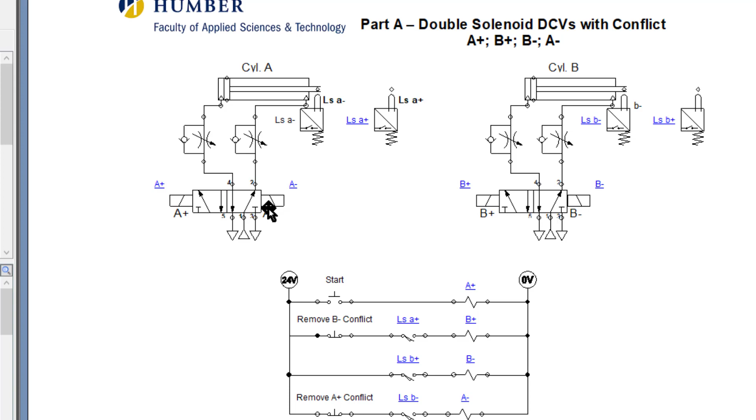So for this drawing, I think I'll just take the ladder logic and put it aside, since I'll probably rebuild the whole thing, but I'll stick it over here. The other thing is I'm going to need 3 cylinders, so I'm going to grab this whole thing, copy it, paste it, and put it down here. Now I have 3 cylinders, and I can just modify what's here.

Like I said before, I want to get some other information, and that's going to be the ancillary equipment - the compressor, the pressure regulator, and the receiver tank, and maybe a couple other components from the ancillary equipment lab, Lab 6, which you'll be doing in week 7 online. I'm going to save this project because remember, this is a previous lab you've already built and already put all the love into.

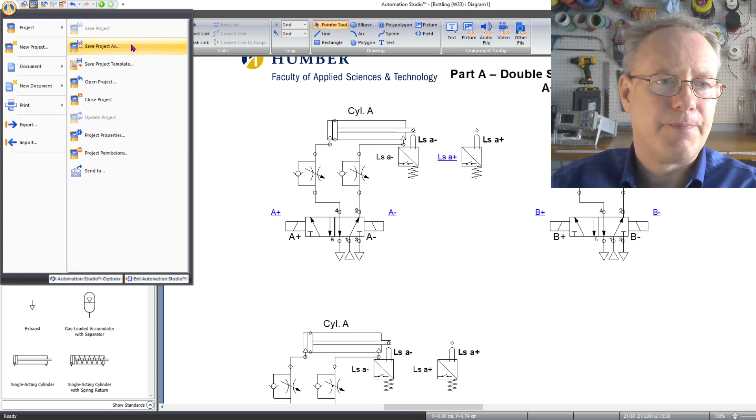So let's not redo all of that. I'm going to save this as the bottling station assignment - project, save project as, and go to here. I've already got it saved, so I'll override it, that's fine. Now I'm going to open up the ancillary equipment lab that you'll be doing in Lab 6. Let's just wait for this to open this project up. Perfect.

As this is opening, Automation Studio is still running, so this is just a project within it. I can actually select everything here and copy it. Now I can go open that other project I had and just paste it all in.

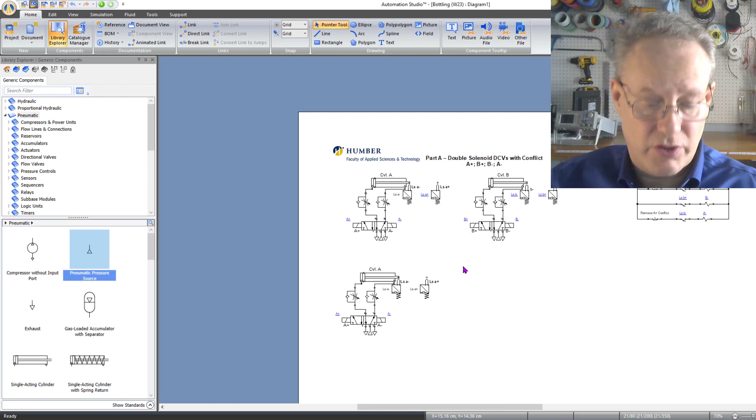Because I haven't closed Automation Studio, everything's still in memory. So this is the whole thing from the ancillary lab. I'm just going to zoom in here, and I'm going to say, you know what, I really don't need any of this stuff at all. I don't need this guy.

This is a really cool component, one of the really cool components you're going to be using. I don't actually need this guy, but I'm just going to keep it and put it over here. So I'm going to get rid of that.

So this is pretty much what you're looking for. You don't need this, and you don't need that because that's a bleed off valve. We're not going to be doing that. I'm going to take this and just put it aside and leave it till later.

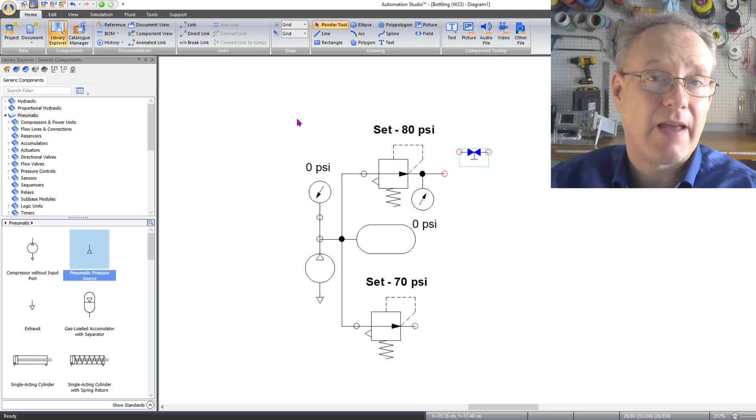What it's going to do is replace this symbol. Anywhere we see a pressure source, it actually indicates that's the entire compressor with the tank and the pressure regulator and everything else. So we're going to add those things into all labs moving forward after the ancillary equipment.

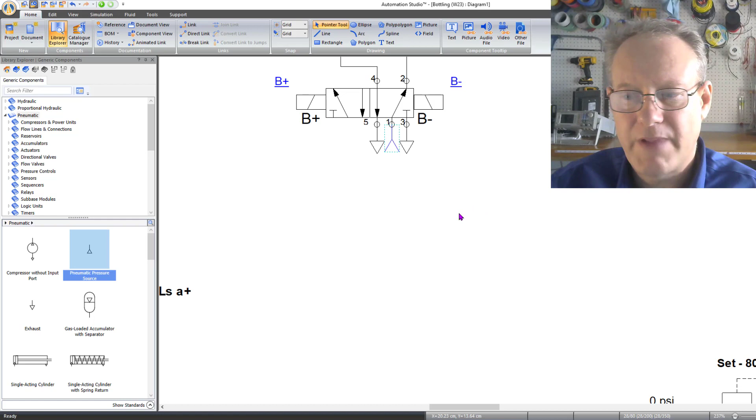You can open up, say, lab 4 or lab 5, save it as lab 7, then open up the ancillary equipment lab, grab that, copy all of the regulator, the tank, and the pump, and paste it into your new lab 7. That's a good trick that will empower you in the future and save you a lot of work.

I'm just going to start cleaning this thing up and modifying it to be the Automation Studio drawing for the bottling station assignment.

I think the first thing I'm going to do is rename it. Definitely going to shrink this in because you don't want those huge text boxes. And I'm going to show you a problem with text boxes getting in here and there.

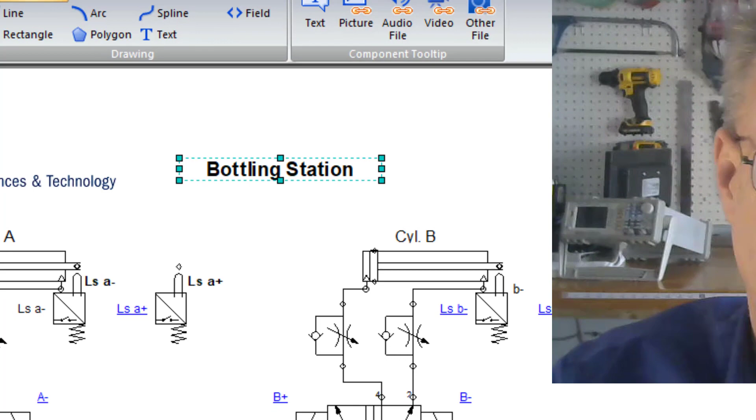Now this is cylinder A. I'm going to call this the clamping cylinder, so I'm just going to call it C. Now the problem is this text down here still says A. But look at this, I can't grab that because it's right inside here.

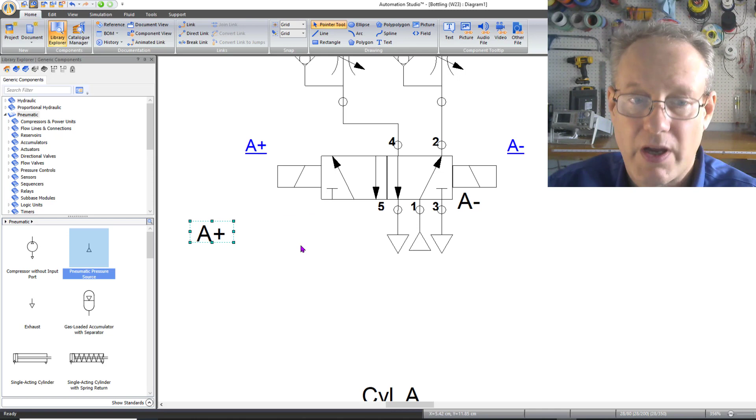So I'm going to try and do this. I still can't grab it. I may be able to grab it if I do that. I did grab it, so I'm going to put it out of the way now. I'm probably not going to be able to grab this one. No, I'll show you a trick.

Just try and grab it, then go here and pull this up, and then click out of here. And now I can actually move this out of the way. So text boxes get in the way, and when you try to put one box over another, it creates a problem.

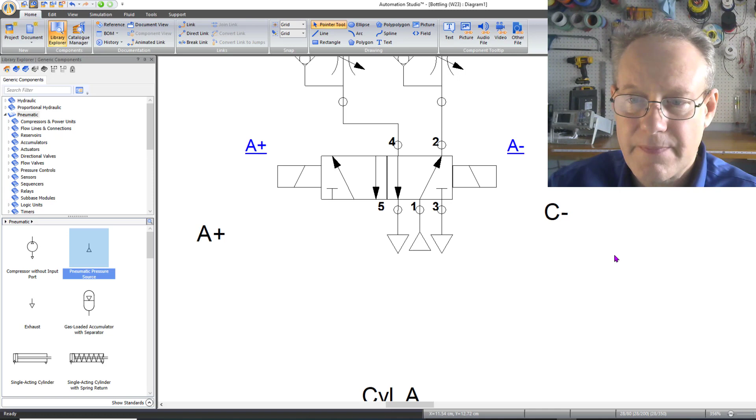I'm just going to say C, and stick that right here. I'll change this guy, and that's C, and I'm going to put it over here so I can grab it on its own. Yep, I can grab that without actually grabbing the valve. Actually, I think I can put that in a little closer. Good, so there you go.

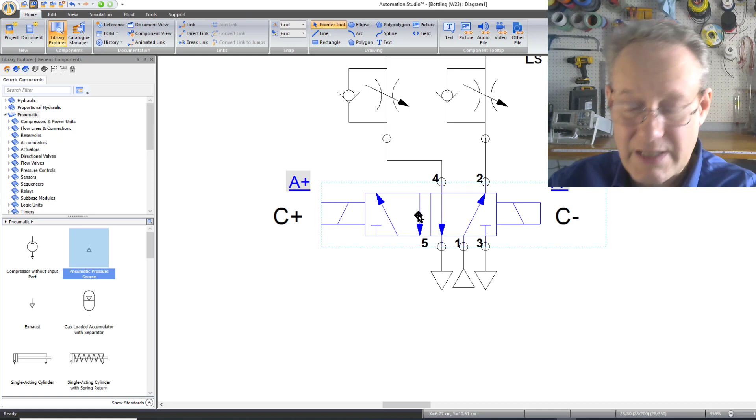I've got that changed. Now I can take this and rename these solenoids, but it's actually a lot quicker for me to just delete this guy and put a new one in. But you see, all of the port numbers are still there, and everything's already aligned, so I'm just going to leave that.

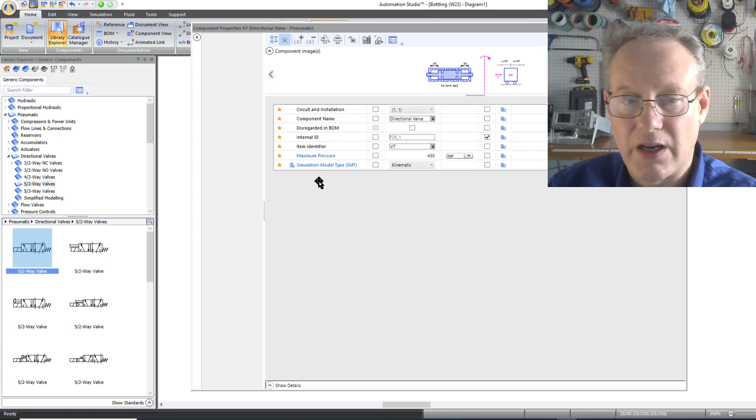So I'm going to go for some directional valves, and I'm going to go for a 5-2 valve, and I'm going to use this one. There isn't one in the library that's automatically got a double solenoid. That's all right, I can just click on this and turn it into a solenoid and close it up, and I'm good. Yep, save changes.

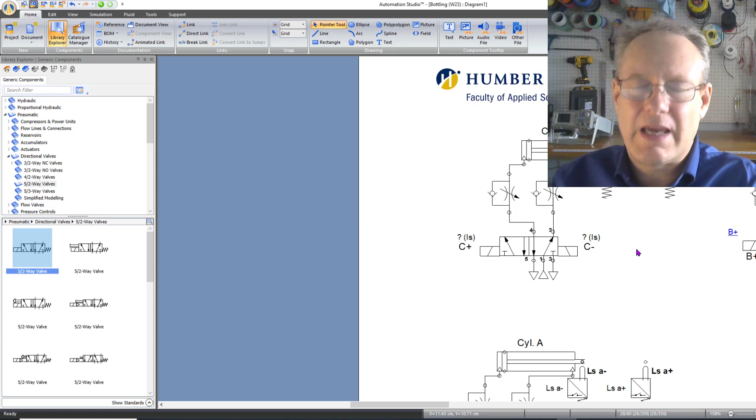Perfect, so now I've got that, and that's good. I'm going to name these guys later once I start doing the ladder logic. But for now, I want to clean this up and make it as close as I can as far as the components go for the bottling station.

So that's the clamp. Now what I'm going to do is go over here, and this is going to be my capping cylinder. I'm actually going to call that P because if I called it C, that's a little bit weird. Capping, punch, maybe a punch cylinder, a cap, I don't know, whatever you want—it's actually discussed in the assignment.

It's actually called capping, not punching - capping, or cap punching, whatever. So that works. I'm going to delete this, but I want to think about what is required from the lab, from the description of the project. I'm going to share my screen here.

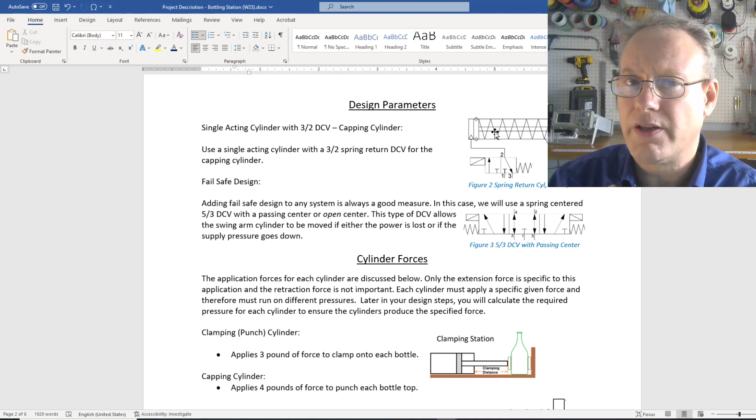Now, the clamping cylinder is a double acting cylinder, and it's going to need a 5-2 DCV with double solenoids. I just know that. But in this case, I have a different situation - I have to use a single acting spring return cylinder. This is a pretty cool situation. Once you read this, you'll understand exactly what's going on with the capping cylinder, and it has to do with the alignment and stuff.

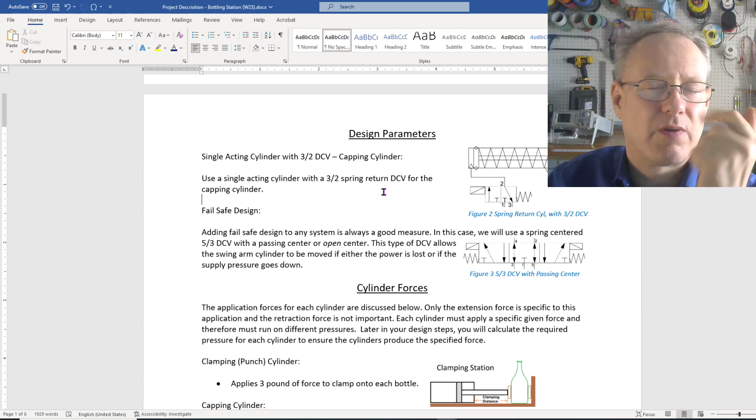Right now, I just want to focus on drawing this. So this is what we need to draw. You know what, you can actually just copy this and paste it in here so you've got an idea of what you have to do, and then delete it later. Or you can just take a screenshot of that and put it here.

So what I know here is that I do not have any metering. We'll talk about metering in the ancillary lecture, which is in week 5. So you'll have a really good understanding of that.

I'm going to move these out of the way now because I know I had a bit of a problem capturing them. Right now I'm going to choose the correct DCV for this.

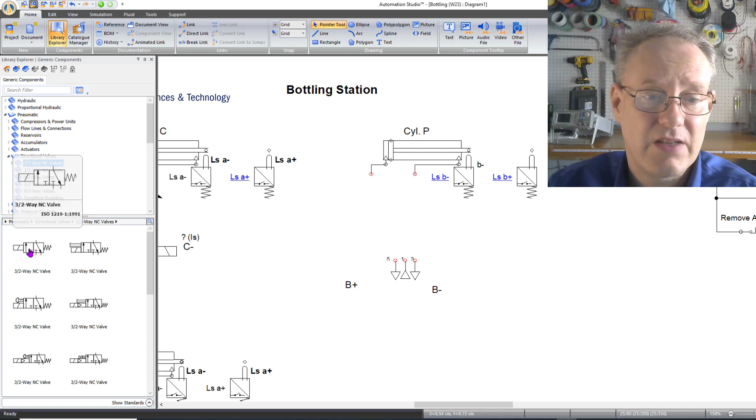It's actually a 3-2 DCV, and there's one right here. I want to make sure I place it properly because I want the exhaust to be on 3. So I'm going to put that there, and I don't need this guy, so I'm going to delete that.

And this cylinder actually has to be changed. So I'm going to delete that cylinder, and I'm going to delete this guy and this guy. We'll work on limit switches later.

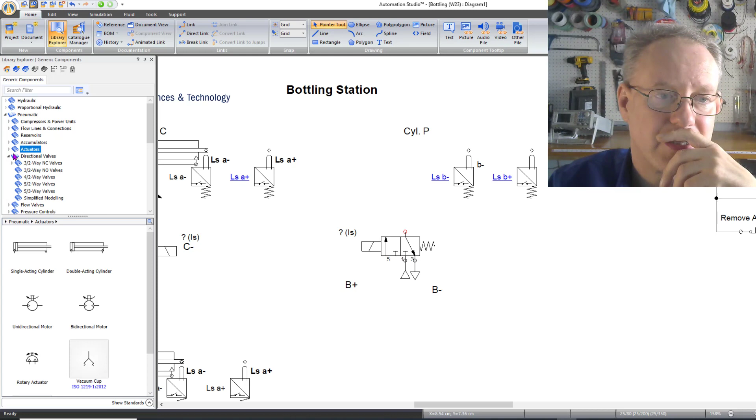So I have to go find the right actuator for that, and that's going to be a single acting actuator, a spring return actuator. I'm going to put that there, right up with this limit switch. I may want to move some stuff around later, but right now my focus is to get the components in, especially to let my brain go, okay, I think I got this.

Now I can clean things up. Just focus on getting the parts in first, and before you move stuff around - I guess I can move this up a little bit.

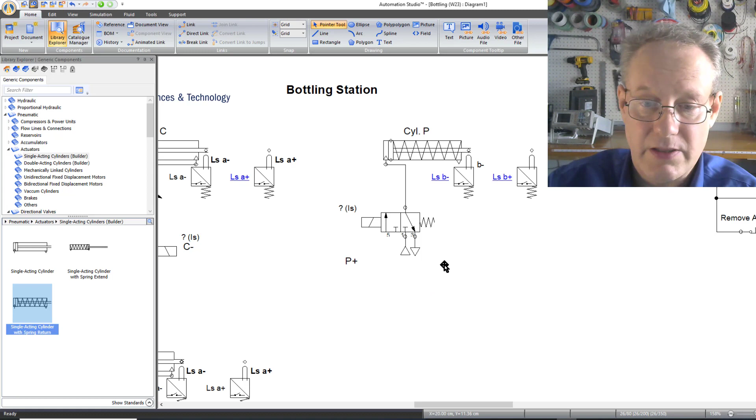Okay good, so now I know that this is going to be a P, and it's going to be a P plus, and I'm not going to need this guy because I don't have another solenoid. So I'm just going to stick that over there.

Okay good, so now these limit switches - we have to think about the limit switches for this punching cylinder, or the capping cylinder. Essentially, I think the best limit switches are going to be reed limit switches. You could use a mechanical limit switch on the return and then a reed switch on the extension.

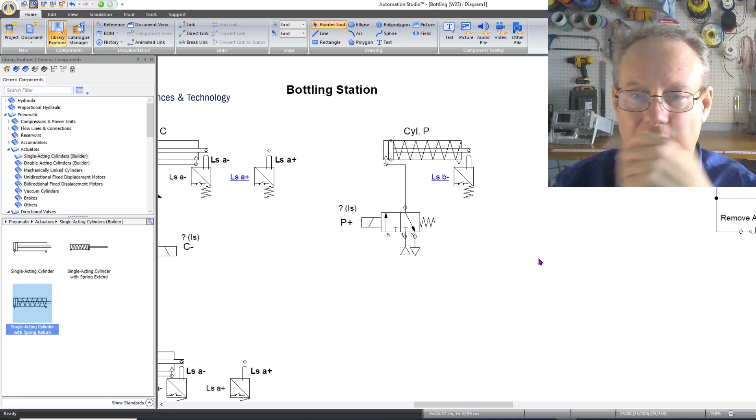Let's do that. I'm going to get rid of this guy - bam, he's gone, okay good. So I'm going to get rid of that, and what I'm going to do is go into my sensors.

I'm going to take a look at sensors, and there's a reed switch right there. I'm just going to dump it in, and when I do, it's going to ask me a question. First, I'm going to put this over here for a reason, and I know that because it's going to be P plus.

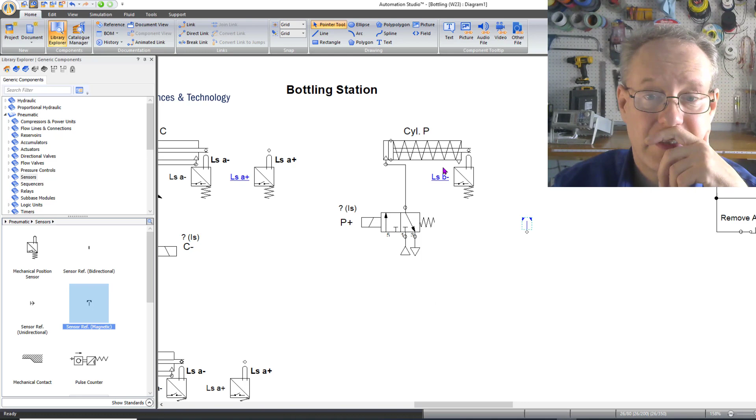The reason is because I want to rotate this. You know, now that I'm thinking about this, I could still use a mechanical switch here, but it's probably best if I just use a reed switch because it's smaller, and for the capping cylinder I can just place it right on the cylinder.

Okay good, so that's LS P minus. Perfect, okay good. So now I have to rotate these because this cylinder also has to get rotated because it's punching down.

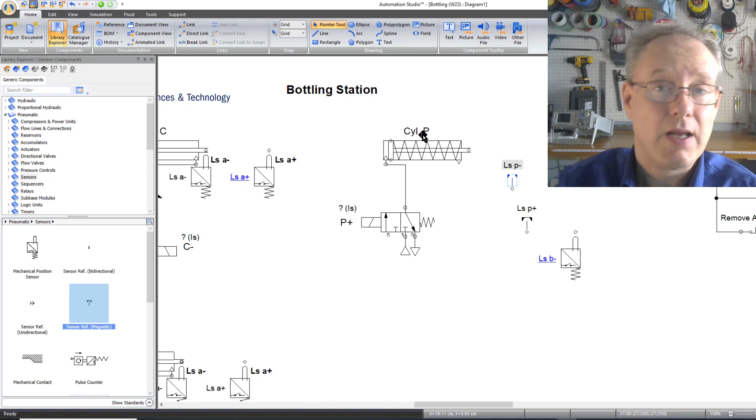So I'm going to move that. I'm going to take this guy, put this out of the way. I'm actually going to delete this line. I'm going to take this and put this up here. I'm going to hit Control H.

I mean, I've been using this software for a long time. I know that I can just hit Control H, but I'm going to hit undo, and I'm going to show you how to do that by not doing that.

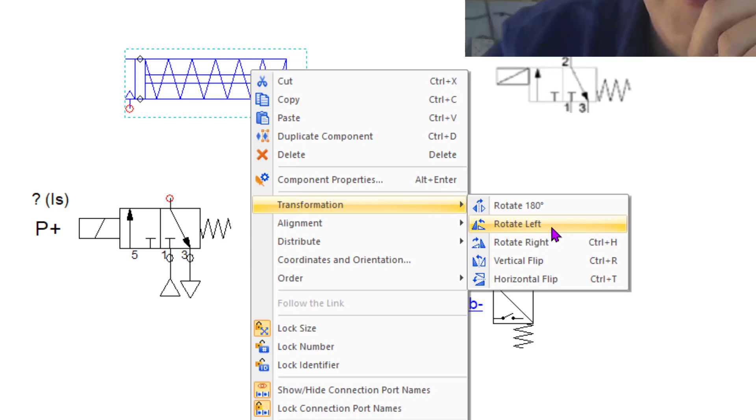You can do transformation, and you can do rotate right. Good, I'm going to have that because it's punching downwards. So now what I've got is I've got these guys, and they have to be rotated as well. I'm just going to hit Control H. Perfect, so now I'm going to stick this guy up here.

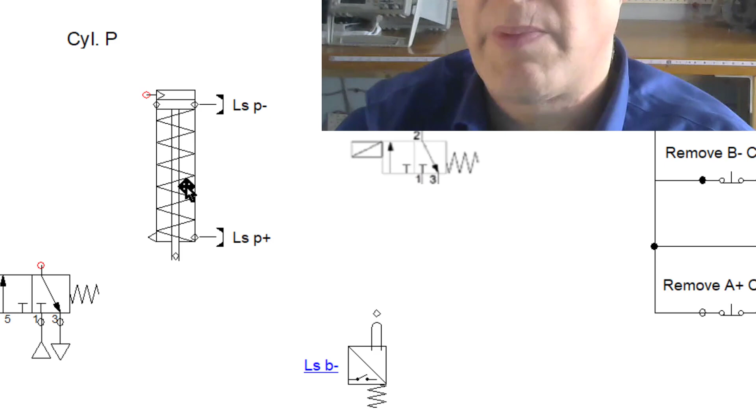Now, for me to get the position of this properly, I don't really know, I'm just going to guess. I'm going to click on this, go to Data, and extend it 100%. So in extension I'll go 100, and it will extend, and then I know where to place this. If I zoom in here, I didn't quite get it right. Okay, there you go, so that's how you know how to place it.

And then what I can do here is just click on this guy again, and say 0, and it will retract. Good, I'm going to get rid of this because I don't need that.

And now I'm going to maybe just stick this guy up in here somewhere. I'm going to zoom in and put this here. Nice, so I don't need any metering on this because this guy is going to... I just got that, didn't quite get it right. There, it's got to look pretty. It's got to look good.

When someone looks at your drawing, all of the positioning and everything has to feel good. The geometry has to feel good because they have to like your drawing. Really, that's a big part of presenting information. Someone's not going to be like, oh, that's such a pretty drawing. No, they're just going to look at it, and they're not going to feel like, oh, that line goes all crooked and weird and this just kind of seems out of place. No, it's got to just feel right.

Okay, good, so when I moved this I had a problem, and it looks like my port numbers got all moved too. So I'm going to grab all of these. I'm going to move that up there. I'm going to grab all of these. Oops daisy, my port 2 just disappeared. I don't know what happened to it.

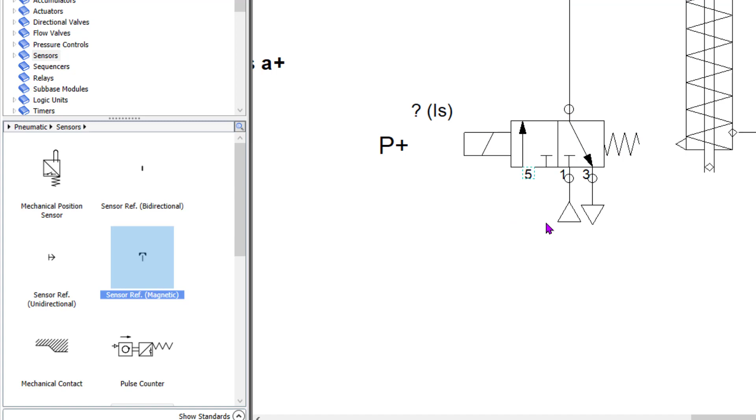But I can grab, ooh, see, it's difficult, I want to grab just that 5. Oh, I got it. I'm going to go over here and grab a number 2, because oops daisy, hit escape. Escape is a really good button. Copy, awesome. In Automation Studio, nice, okay, that's going to go right there.

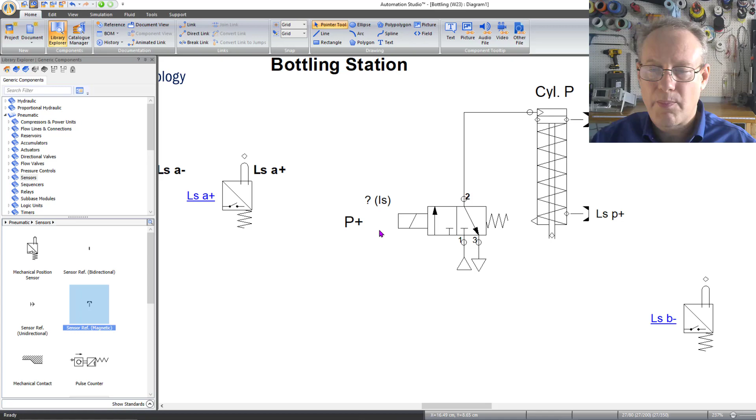It's funny, it's kind of jumping around a little bit. You can use your arrows to move things as well. There you go, that's good enough. Okay, perfect, here we go. So we've got our port numbers. This guy's all set up, and that doesn't need any metering.

What metering does is it slows the cylinder down in extension or retraction. Actually, let me pause and talk about metering because it has to do with timing. So if we take a look at the description and go to timing, we can see that certain cylinders take a certain amount of time to extend and/or retract.

So the clamping cylinder that grabs onto the bottle actually takes 3/4 of a second to extend. Now if it was moving at full speed, it might take a 1/4 second, even less, or half a second. But it's probably metered because you don't want to just smash onto that bottle. You want to kind of just clamp it, you don't want to come at it too quickly. So the way to do that is to slow it down.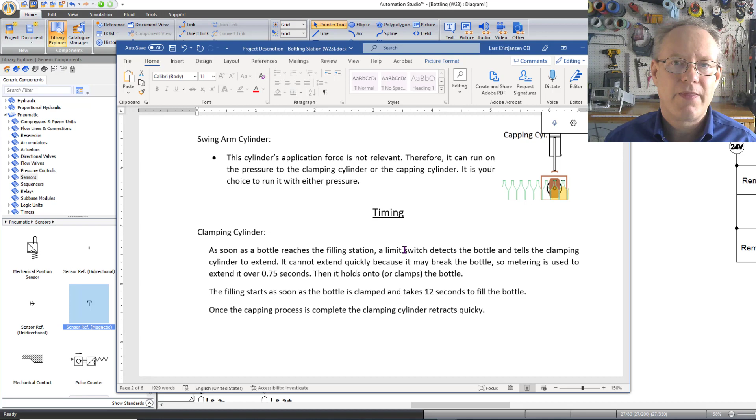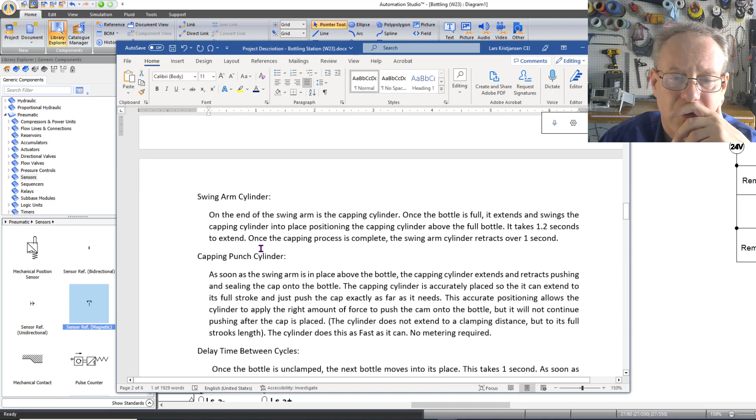So anywhere where you see that a cylinder takes a certain amount of time to extend and/or retract, there's metering there. You want to put metering where you see those numbers. For instance, here, for the swing arm cylinder, it takes 1.2 seconds to extend and 1 second to retract. So it's going to extend a little more slowly than it will retract, so you're going to have to put metering on both sides.

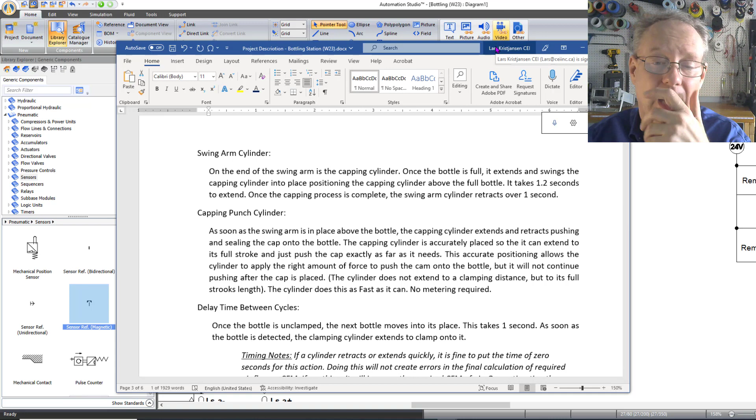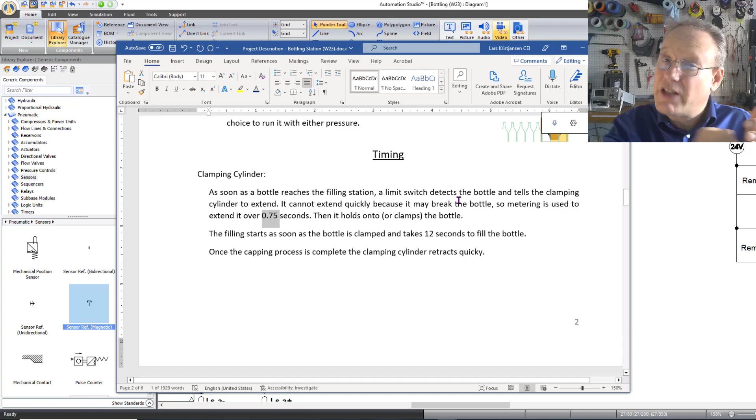Let's take a look at the punch cylinder, there's no metering at all. Okay, good, so we know there's going to be metering on the clamping cylinder in extension, but not in retraction, because timing is everything when we're designing these pneumatic systems or any automated system. A 1/4 second at the end of a day adds up to half a minute, and a half a minute over a week adds up to much more, and over a month, much more, and at the end of the year, a 1/4 second is going to cost you $1,000. So you want to just dial those times down.

You want to be accurate wherever you can, to make the time shorter, that's fine. So the cylinder in extension has to be metered, but in retraction you just get it out of the way, because it's got to get out of the way so the next bottle can come in.

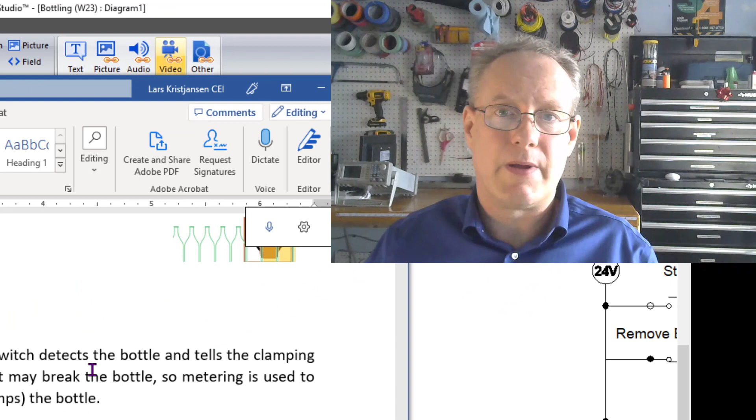So moving on, we know that the clamping cylinder is going to have to be slowed down in extension. Now the way we do that with metering is we slow that down. I'm going to get rid of this and this. We slow it down by putting metering on the output port, and we'll learn that in the lecture.

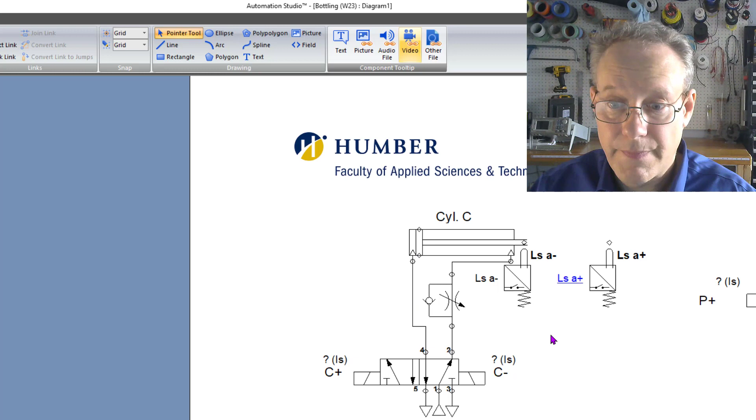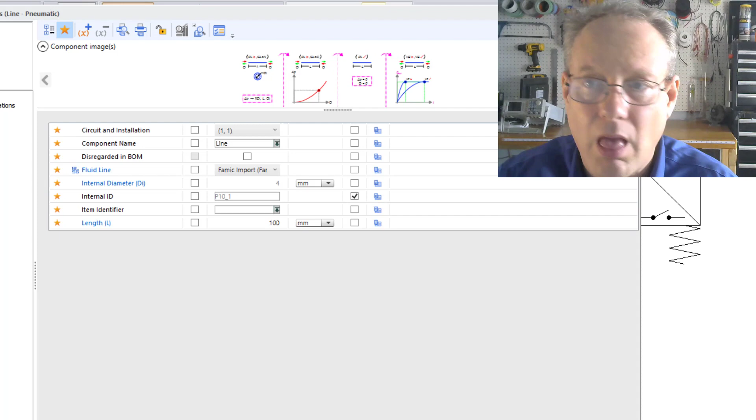Ancillary equipment. Okay, good, I had a pause there. Yeah, that looks good. You know what, just for a little bit, I'm going to take this and move it down a little bit. I don't know, my brain just wants to do that because it feels like they look good. For instance, if I had this and stuck it up there, that wouldn't feel right. It just doesn't look right. So put some love into your work.

I just hit Control Z to get that out of there.

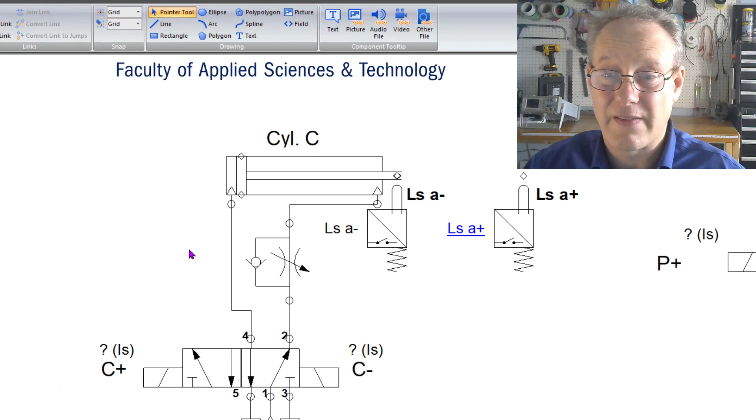Okay, good. So now for my clamping cylinder, definitely I'm not going to have an outside mechanical limit switch because that's going to get in the way. For the retraction, I can put a mechanical limit switch in there.

So I need to put a reed switch in here. I'm going to drop this in. You know what, I just know where this goes, I'm pretty sure it goes right there. So that's limit switch clamp plus. Perfect, okay, I'm going to roll with that.

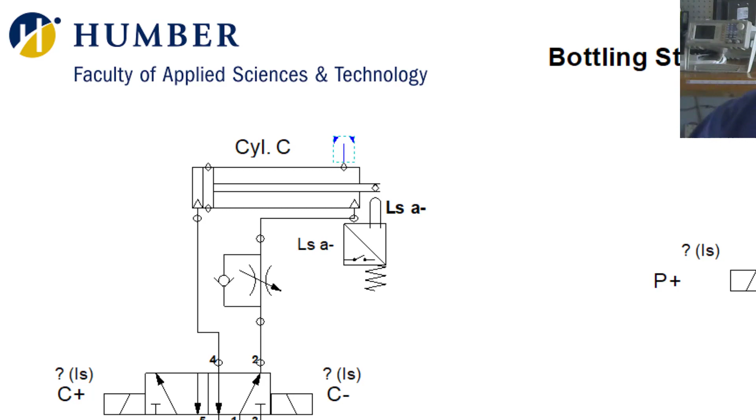If my simulation doesn't work, I'll know that I haven't placed this properly. Actually, you know what, I don't think I did, I don't think I put it right. Let's check it out, let's see if I can get that extension to 100% just to check. I did. Okay, I'm going to hit Control Z, which just takes it back, saves me having to go in the menu.

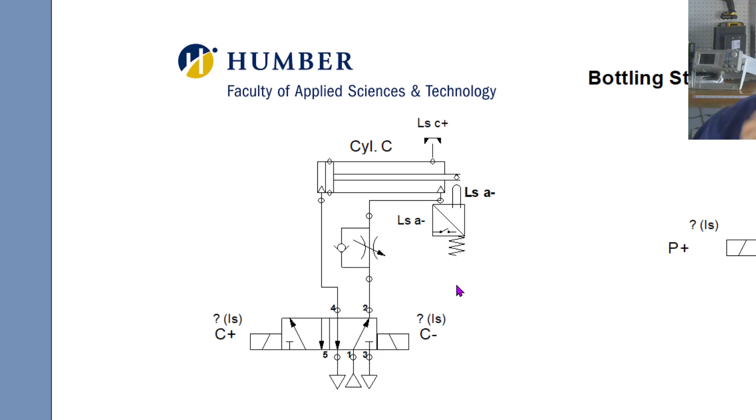Awesome, so I think I've labeled stuff here. Oh, I've got to label this guy. Actually, let me tell you something, I'll get rid of that. That's a text box that I added in. I can delete that because when I name this, the name will be beside it. What I'm saying here is it's probably best just to delete this and put a new one in, and the reason is because for me to go in and rename that is actually a lot of work. So I'm just going to hit delete and throw a new one in.

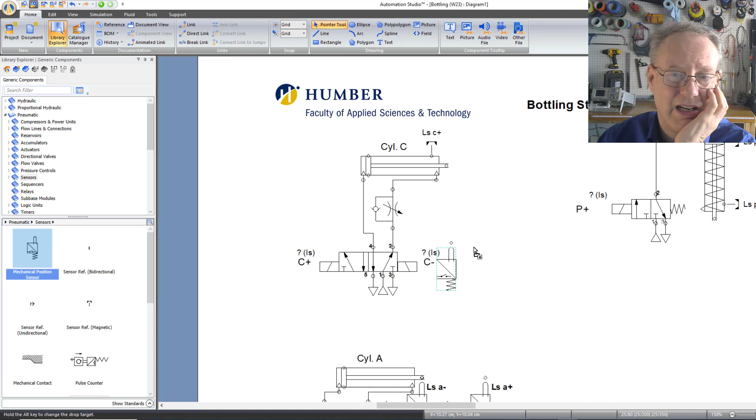Now it'll ask me what the limit switch name is, and that's limit switch C minus. Oops, that's not what a minus looks like. Perfect, okay good. All right, so now this guy is going to be the swing arm cylinder, and it'll be interesting, we can use mechanical switches here.

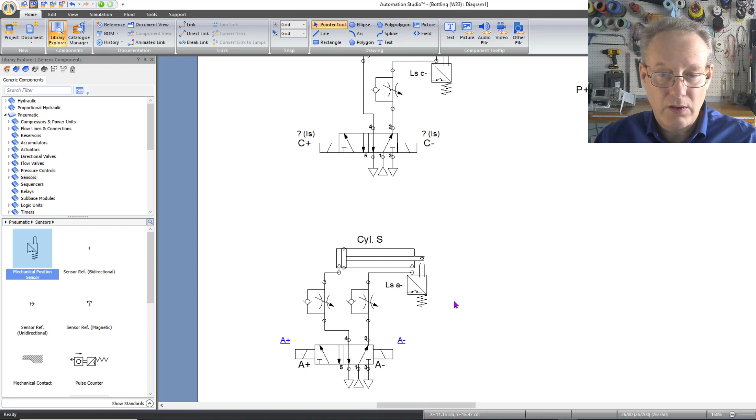You know what, I'm going to delete this and this, and it's going to be interesting to talk about. You know what, I don't want to delete that just yet, and the reason is because I'm going to be able to place the other one in the exact spot if I leave that there. So the DCV in this case is going to be pretty cool, and we'll talk about that. Let me just throw another limit switch in here.

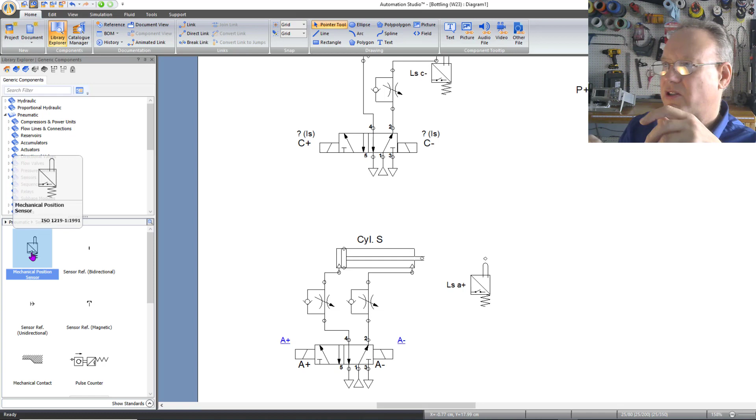Now thinking about the swing arm cylinder, one way or the other, it's extending and retracting. I don't know, I'm going to put a reed switch on one side and a mechanical switch on the other. When you physically go and build the thing, you may find that it works better the other way. I don't know, I'm going to put a reed switch over here. The reason I'm doing that is because LS swing minus is easier to place. If I put it out here, I'd have to extend the cylinder.

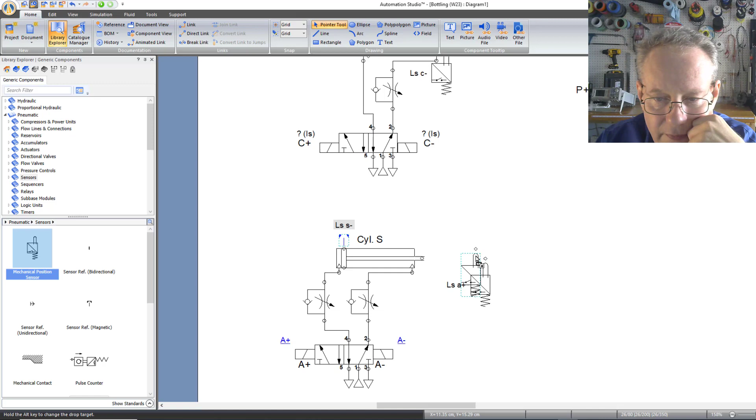Okay, good, so like I said, it doesn't really matter at this point because I don't really know. Limit switch swing S plus. Now I'm going to grab this and delete this, and take this and push it down by one. So I use the arrow keys to move things around.

You know what, I don't think I got that right, I'm going to do the arrow key one more time. Yep, that's definitely going to be aligned. I know it's the right distance out because I put it exactly where the other one was.

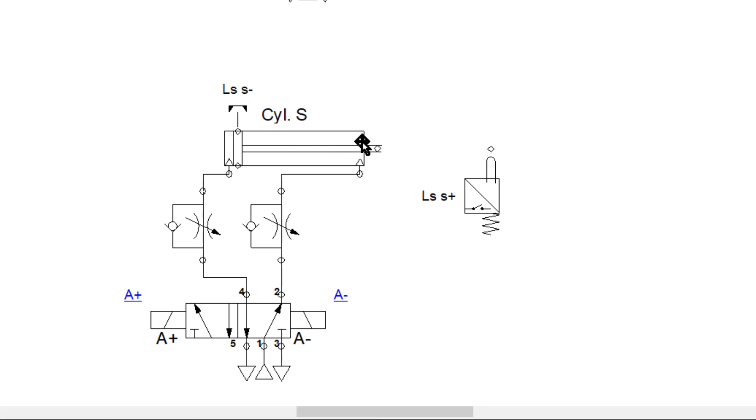Let's put in the DCV. I'm going to delete this guy, and then that allows me to take this text box out of the way, and this text box. The reason I'm deleting it is because let's take a look at the operational specifications.

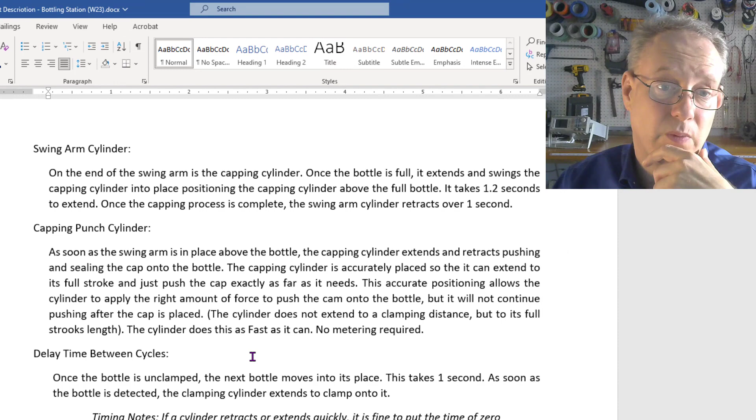For the swing arm cylinder, actually it has to do with the design specifications. And that is all about safety, or more specifically, what we call fail-safe. So if a system fails, you want it to fail safely, so that the failure is not catastrophic.

In this case, if the power goes out or if the pneumatics go out for whatever reason, we don't want a cylinder stuck in extension or stuck in retraction. That swing arm has the capping cylinder on it. So it'll swing over, the capping cylinder goes, and then it swings back.

We want it so if the power goes out and it's right over the bottle, I want to be able to pull it back manually. But as you guys know in the lab, when a cylinder is either in extension or retraction, you can't move it. The pressure is constantly pushing it in extension or constantly pushing it in retraction.

But what do we do if we want to just be able to swing it one way or the other? Well, use a 5-3 DCV, a 5-port 3-position DCV. And that's in this discussion here.

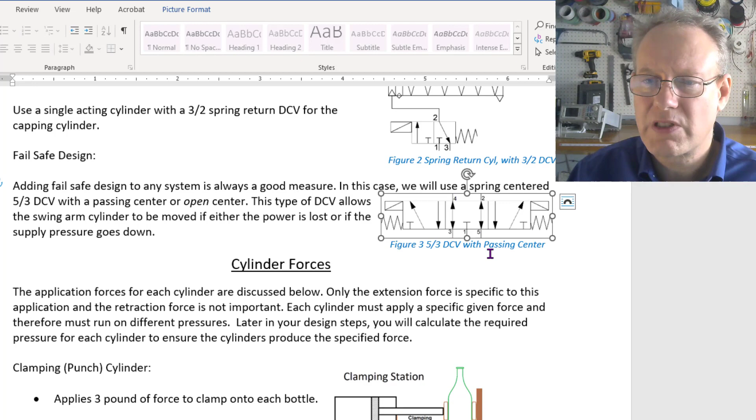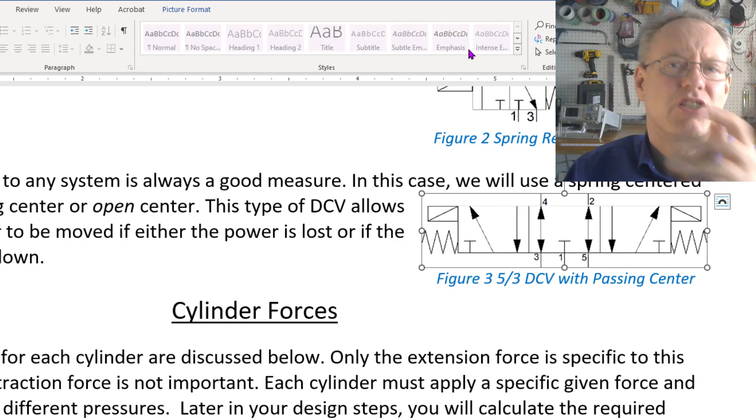So that's pretty cool. More specifically, the center is going to be an open or passing center, and that's going to allow the air to pass through, going in and out of the cylinder as it's physically being moved one way or the other. Essentially, it's open to atmosphere because both of these are connected to exhausts. Let's go into Automation Studio and plug it in.

I'm going to go to my DCVs, down to directional control valves. I know it's a 5-3, and it's spring-centered. I've actually never seen the use of a 5-3 that's not spring-centered.

The reason is because when you turn either this off or this off, whether it's a push button, a pilot, a solenoid, or a pilot-operated solenoid, whatever it is, however it works, when you don't activate either, it springs into the middle. It pushes into the middle. And the springs are necessary.

Now what I want to do is change this. Let's take a look so you can understand what I'm talking about. If I were to physically try to move this cylinder right now, I couldn't move it. I couldn't pull it out. If it was extended, I couldn't push it back.

The reason is because it's blocked. The air can't go in either this port or that one. It can't get through the DCV.

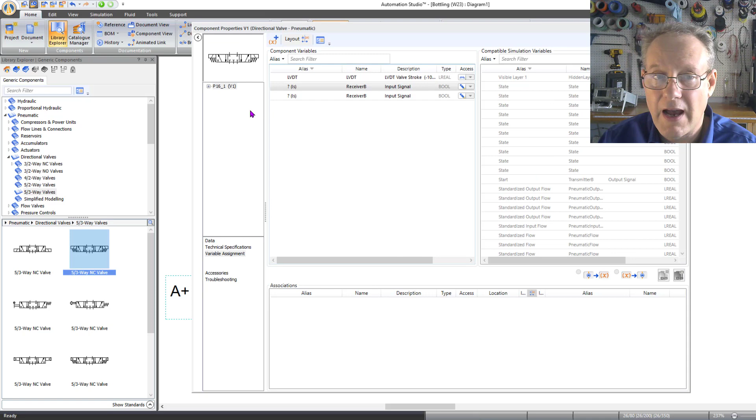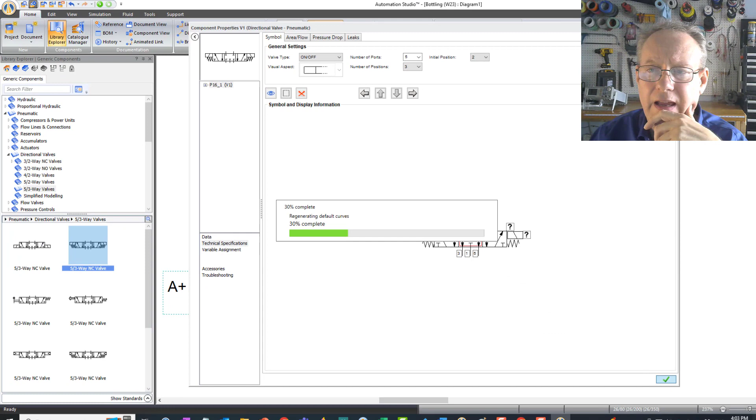So I'm going to double click on this guy, and go into my builder, which is technical specifications. I'm going to double click on the middle and change the center position of this DCV, and find the passing or open option right here. There you go, awesome. I'll close that, and it's going to save. And there you go, perfect.

So that's done. Now we know that I can change this font. I was smart to move that out of the way because I think I would have struggled getting it out of there. So that's S, and this guy is also S.

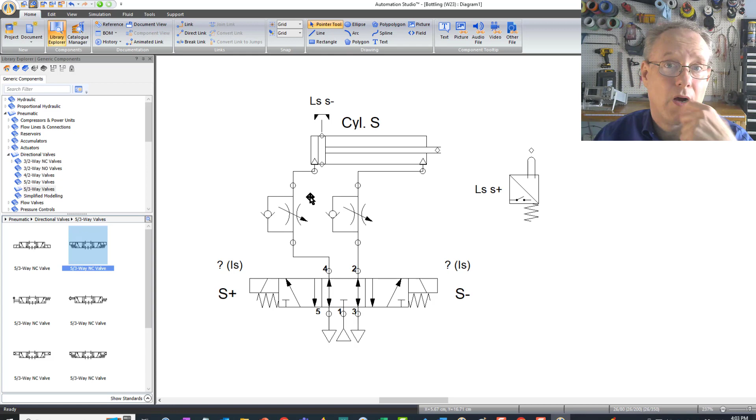Perfect. Now, we do want metering on this, for sure. You want the metering in here, so you're going to leave it because it's going to extend, and it takes 1.2 seconds to extend, and 1 second to retract. If there was no metering, it would extend and retract really quickly, like within a quarter second. And you've seen the cylinders move in the lab, they move really quickly.

Okay, so this is future me. I just want to pop in here and mention something about the metering. You can adjust the metering in Automation Studio. But essentially what happens is that often in hydraulics, pneumatics, and fluid power, when we put anything that's physically adjustable by hand, often in the field, once we build the thing, we look at the specs and say, oh, the cylinder is supposed to extend over 1.2 seconds. So you run the cylinder and tweak the metering a little bit until it does take 1.2 seconds to extend.

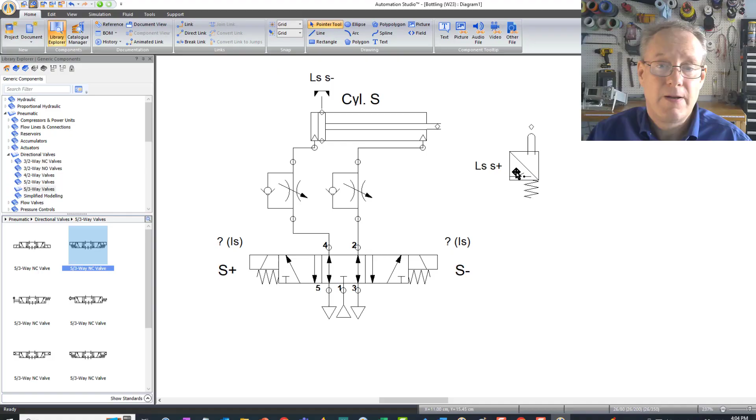If you want to actually do metering in the Automation Studio simulation, you can go ahead and do it, but I'm not going to check it, and your instructors probably won't either. As long as there's metering there, you're good, because essentially you're building a schematic. If we were studying flow rates, we'd want to tweak the metering so cylinders extend over exactly 1.2 seconds or retract over 1 second, but we're not doing that, so you don't have to fool around with it until it hits a precise time.

I think as far as all of the cylinders go, I can delete this guy, I don't need this guy. As far as all the cylinders, valves, and ports go, I think everything's good here.

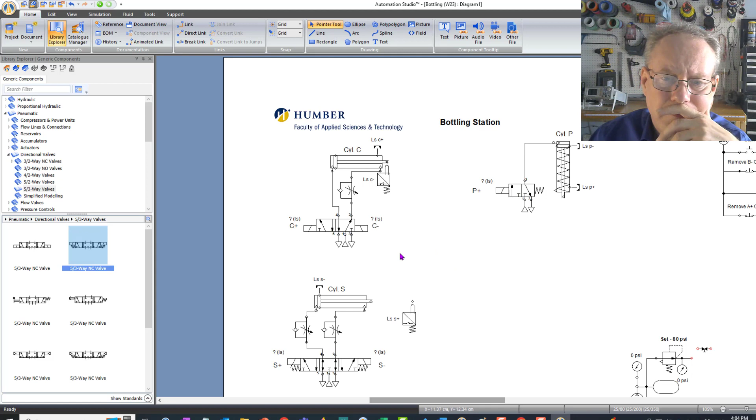Now, the one thing I want to do before I stop this video, because I'm going to do another video on how to design the ladder logic, is I want to get rid of this, and I want to get rid of this. So bear with me for another 4 or 5 minutes, and then we will be done with the Automation Studio, at least the pneumatic portion.

I'm going to put this guy over here because that's consistent with all of the rest of them. Now I want this guy, and I want to pull him up here.

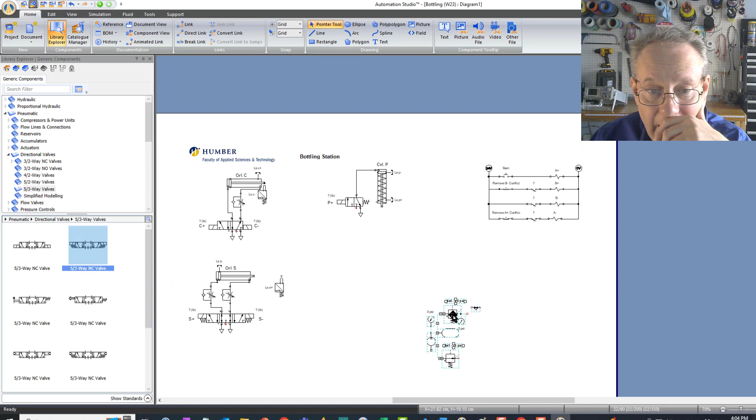What you want to think about is that this has to go into your report, and you're going to take a screenshot of it and put it at the bottom of your report, in your appendix. So you want it to be more portrait looking, up and down, rather than landscape.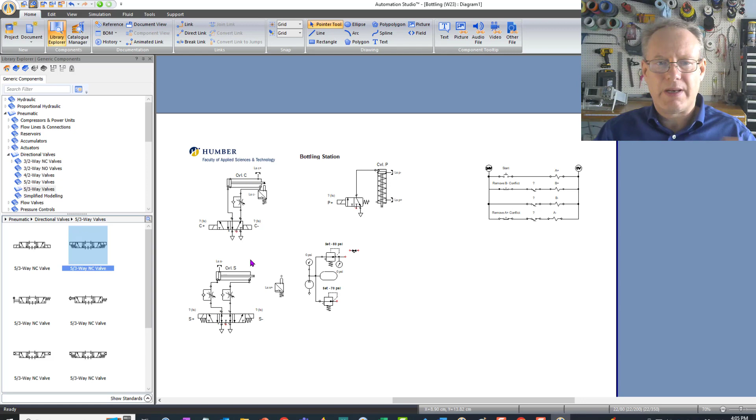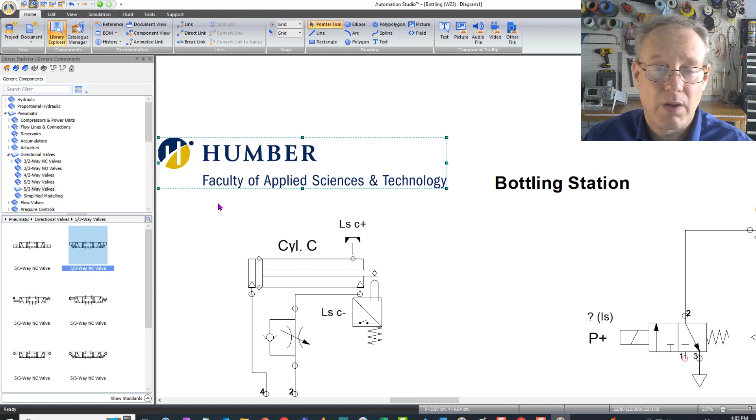So I'm going to probably move some things around. This logo is really nice to have here. You know how I got that? I just went to the Humber website, the Faculty of Applied Sciences and Technology, zoomed in and took a screenshot, then cropped it nice and pretty right to the edges using Paint. Now I have that and I put it in everything. That's where I got it from, not some official source. You can do the same because it's a Humber drawing, so you can put the logo on it.

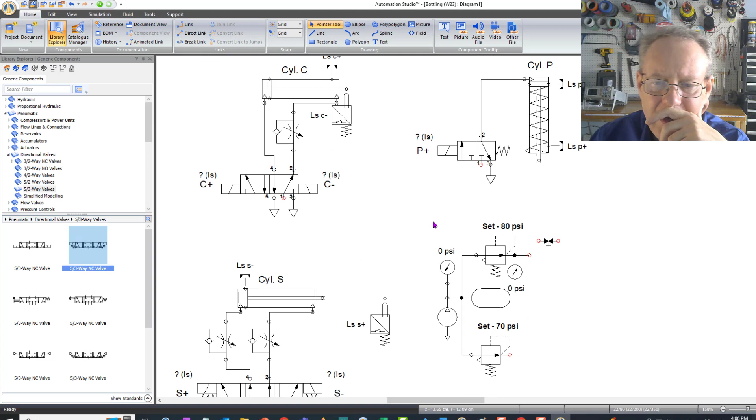Bottling station, I'm going to put that up there. Now this guy, I'm grabbing the whole thing and I'm going to put him over there. I want to put it along this, so these are about the same height apart. I may manipulate this a little bit. Let me move this out of the way for now, grab this, and put it in. I'm going to zoom out so I can get a better look at it. You know what, it's kind of looking good. So now this, I can put here.

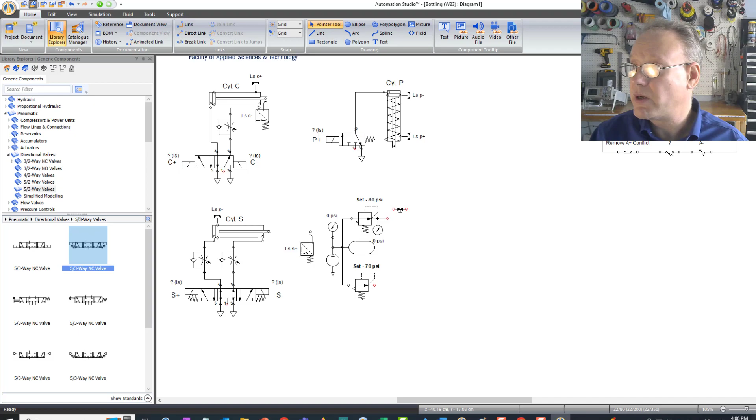Now, there are 2 pressure regulators here, and the reason I put 2 of them is because we're going to need 2 pressure regulators. If you read the project description, it talks about the cylinder forces. So the clamping cylinder is applying 3 pounds of force. By the way, the pressures you're going to calculate here are really low, and that's because we're dealing with glass. So it's going to be 3 pounds of force.

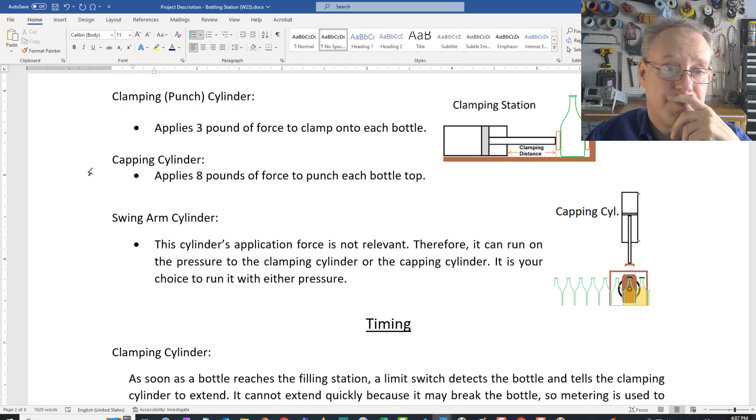Actually, this guy, you know what, I'm changing this right now. It's going to be 8 pounds of force, so you're going to have to calculate for 8 pounds of force. The reason we can apply 8 pounds of force for the cap is because the cap, or the punch cylinder, is not a clamping cylinder.

You can read the description about how the function of this works. It extends all the way, and once it goes all the way, it doesn't keep pushing on the bottle. It's designed and aligned so specifically and accurately that it only pushes the cap on and then stops pushing. So you can apply a lot of force on that, hitting the cap really hard. You're not going to break the bottle because you're not squishing it, you're just pushing the cap exactly onto the bottle.

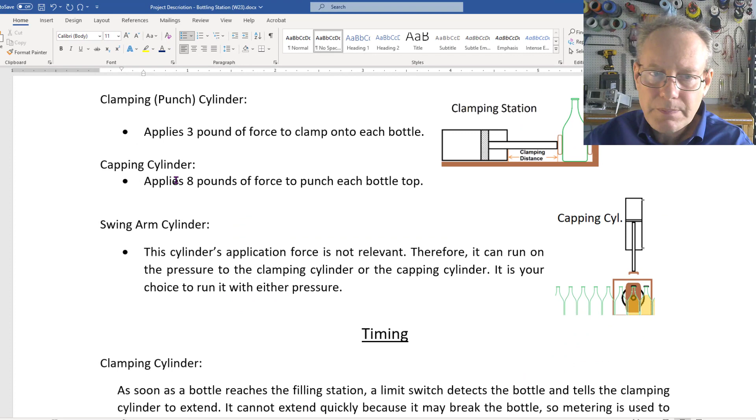So I'm going to have a higher pressure for my capping cylinder and a much lower pressure for my clamping cylinder.

So what's going to happen here is that this guy's pressure, whatever it's going to be, I'm gonna put a double number there because it's going to be bigger. So there you go, that's going to go to the capping cylinder.

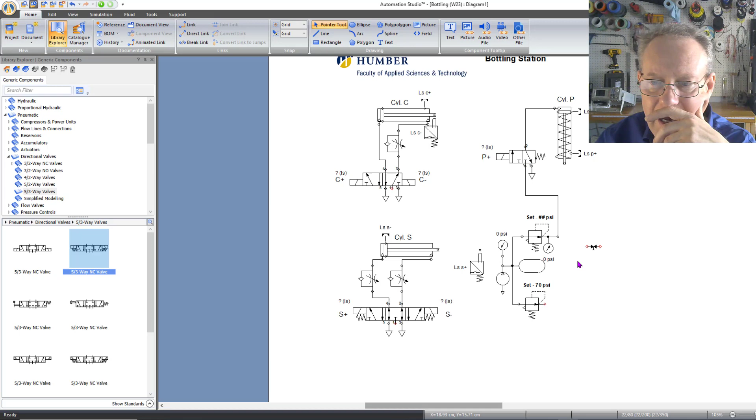I'm going to take this. This is kind of working out, the space and stuff is working out pretty good. That's working out, and it looks pretty nice. This guy, I don't think I'm going to need him, I'll just leave him there so I can take it out before I submit this. I can just take that out. That's pretty cool, that's a ball valve, an on-off valve.

Now, this guy is going to be a lower pressure, so I don't know what that is because you guys haven't done the math yet, but that's all right. I'm just going to put a single number there indicating it, it's not a number, but whatever, we'll just leave a dollar sign. Now this is going to come down here.

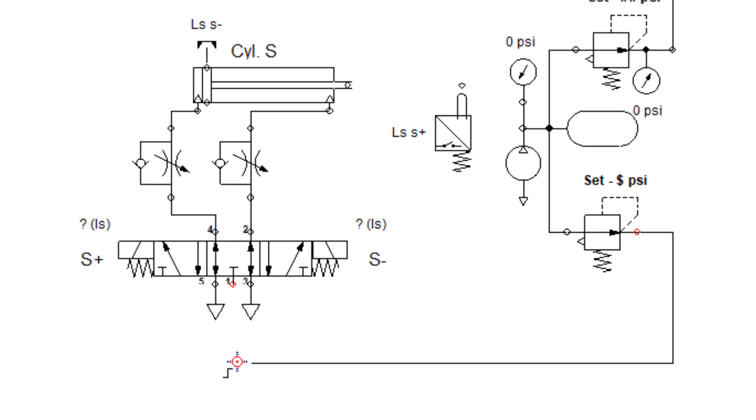It's going to go along here, up here, and there, and this is how we do a T. You can actually get a node in here somewhere and stick it in, but I just do this. I'm going to take this down here.

Yeah, I guess I can go through the drawing. I don't like it because when the cylinder extends, I don't want it going over hoses. That looks pretty good, I think that's okay.

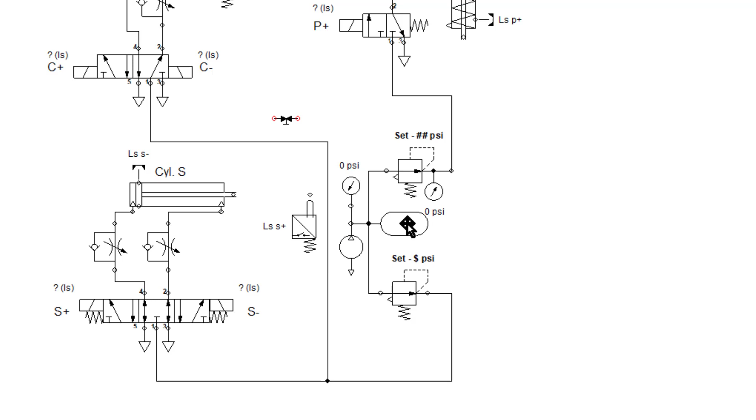And I've got my pressure regulator there, I've got my tank or my receiver, and I have my compressor. You guys are going to set the dimensions for this stuff, actually you're going to set the compressor specifications in here. I think they're probably going to be fine for this bottling station because we're not talking about flow rate, so you can leave whatever the settings are.

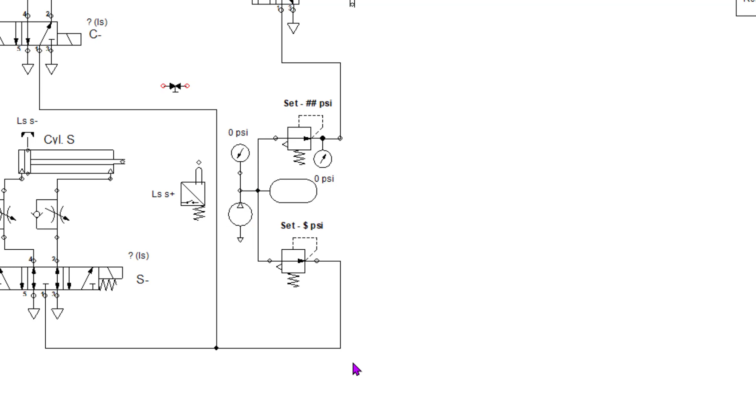Okay good, so that looks pretty good. You know what, I think I can clean this up a little bit by just moving this up. I'm not sure if I can. Again, I'm really thinking about, like, it's got to look good, right, and I got to be able to squish it into... you know what?

I'm just going to hit Control Z and Control Z. I'm going to delete this, then I'm going to grab this and pull it up a little bit to about there. Good, and I'm going to redo this.

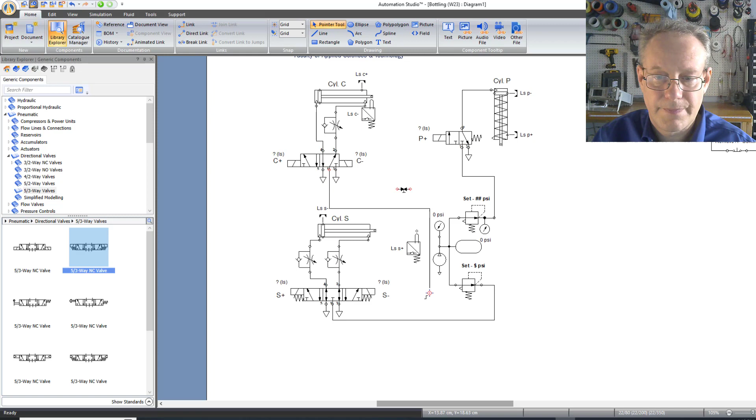Now, if I take a screenshot of that, actually, do you know what, I'm going to grab this whole thing and just move it over a little bit. Actually I have to move, I'm going to grab this guy too. Yeah, I'm going to move it over a little bit, going to go over to there. Good, there, that looks good.

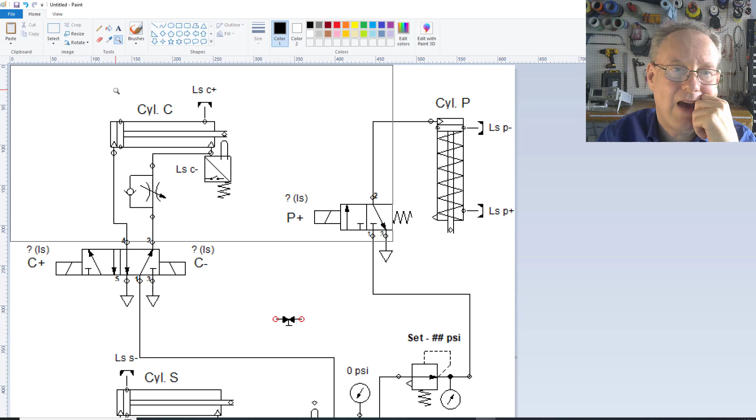Now I can actually just take a screenshot of that. I could do this, and I would personally crop that. I want to make sure that when I put a drawing or screenshot into a document, I don't want a lot of extra space on top of it. So what I do is throw things into Paint so I can clean it up a little bit, so when I place it into a Word document, all that extra space is not there.

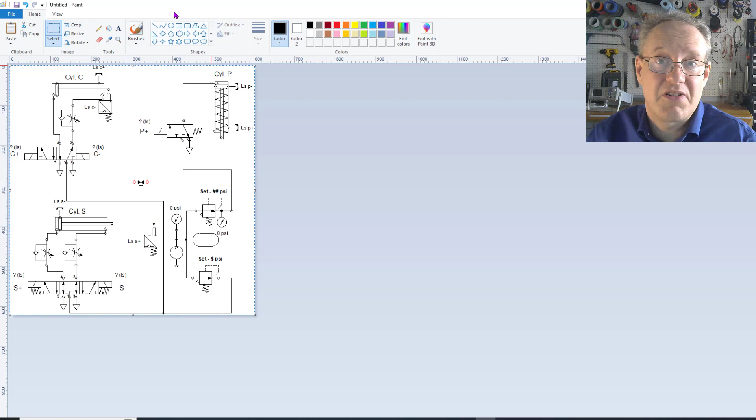So I'm going to grab this guy, select all, copy. You can save this, save it as a drawing, put it somewhere, and then just go paste, boom, paste it right into your Word document, and put it right in the appendix, and it'd be good. Okay, good.

So of course, do that after you've done the ladder logic. When you do the ladder logic, these guys will get named. I think we're good, that looks good.

So my next video is going to be about how to do the Automation Studio. You guys know how to do the Automation Studio, like ladder logic, but I think I'll do a video about thinking about how to design something like this in ladder logic. You've already done some ladder logic designing, so you guys are good at that, at least you have some experience, and I think I'll give you some tips on how to think about your designing. And that's it, okay, bye.